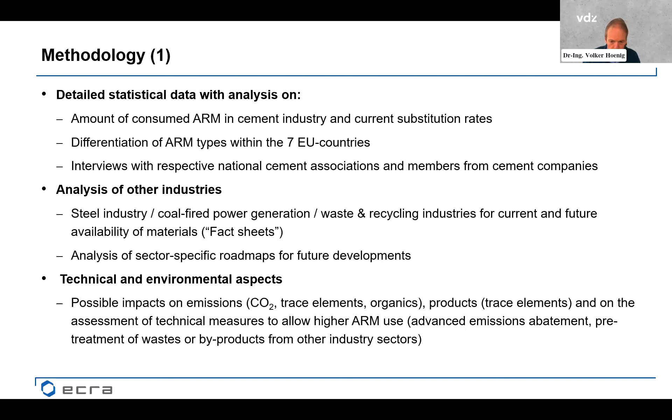Regarding technical and environmental aspects, we looked at impacts of the ARM use on emissions, CO2, trace elements, organics, on the products, mainly heavy metals, trace elements, and on the assessment of technical measures which would allow higher ARM use in the future, like, for example, advanced emissions abatement when we talk about organics, or also pre-treatment of certain materials or byproducts which could be made available in the future for the industry.

On European level, one important aspect was, of course, the contribution of ARM use to CO2 reduction or avoidance, and chances and limitations of the future potential of the materials which are used already today regarding development, and possible new materials which may be used in the future, but which are not yet used today.

Important was to define what we mean by alternative raw materials, because we have seen that the definition in the available statistics is not the same in all countries. So we have said that ARM are defined as materials which are wastes or byproducts from other mainly industrial processes or societal sectors, and which are not classified as alternative fuels. We know that we have materials which are somewhere in between fuels and raw materials, like, for example, sewage sludge. So this was our differentiation here.

We have looked at ARM which are used in clinker, cement, and concrete production. And we have excluded all materials which derive directly from the cement production itself. So we didn't include, for example, bypass dust, CKD, used refractories from the kiln, and so on, and materials which originate from natural sources. So we didn't include natural pozzolana or calcined clays.

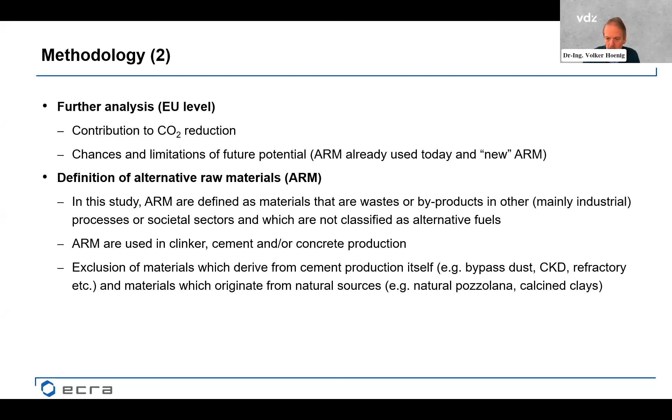As I will only have time to present one country today, together with CEMBUREAU we have selected Austria, because Austria is a very good example of a country with a very well-developed waste market for the industry. This is why I will focus a bit more on Austria today.

I will start with clinker production, so the use of ARM in clinker production. Do you see my mouse? Yes, we can. Okay, so the current situation is characterized by... we used 2019 as a reference year.

Those were the latest data available. About 800,000 tons of alternative raw materials have been used in clinker production in Austrian cement plants, which corresponds to 15% of the total raw materials used for clinker production there. This is the top level in Europe.

When we look at which kind of materials these were, we see in this table the top 10 materials. In Austria there is a certain focus on waste from construction, so waste ceramics, tiles, and other construction products, and on the same level, spent bricks. This is very typical and also very specific for Austria.

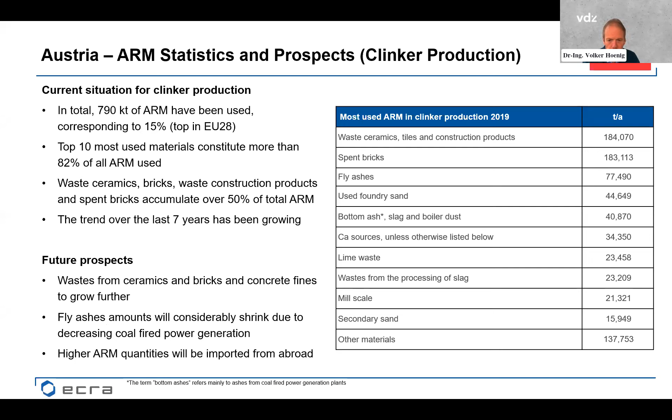Coming to the level of cement production, we see in this slide that cement production was about 4.3 or 4.4 million tons in 2013, and it increased to about 5.2 million tons in 2018-2019. We can see that the level of ARM used in cement production was about 1.1 million tons in 2018 and 2019.

When we have a deeper look at the different kinds of materials, we see that the main three-quarters was blast furnace slag. Austria also has a strong steel industry today, and the blast furnace slag is mainly used in cement production.

Furthermore, flue gas desulfurization gypsum has been used, and also some fly ashes as materials in cement production. When we look at future expectations, it is expected that fly ash and slag will decrease mid to long term, and since slag represents 75% of these materials, this would mean the total quantities of ARM would decrease significantly.

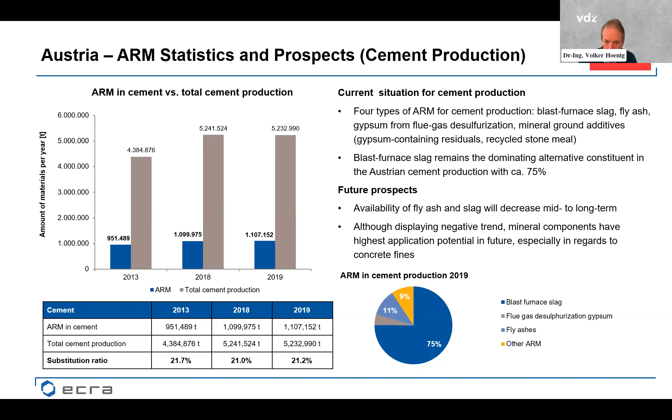Then the third level is concrete production. I must stress that the statistics for the use of materials in concrete production are not as good as the data for clinker and cement production, so what we gained were these results here.

We see first of all the ARM used in concrete production as a percentage. In blue we have Austria, and in gray EU28. First of all, the level as such is much, much lower, at about 2 to 3%, and we see that the trend has been negative over the last 7 years.

It was not possible to get full information on the materials used, but at least the most used one was fly ash, at least from 2018 to 2020, so fly ash from coal-fired power generation went mostly into concrete production.

The level of ARM content in concrete was about 50 kilograms per cubic meter, coming down from more than 60, around 67 to 50, corresponding to only more or less 2% today.

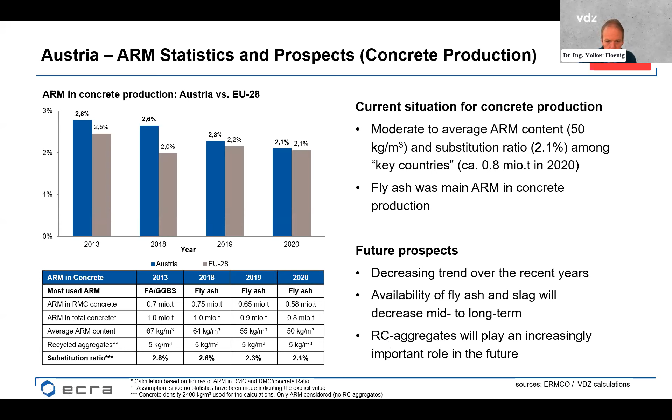Now the very interesting question: what is the level of CO2 avoidance with the use of alternative raw materials? We looked mainly at the level of clinker production. It is not so easy to do this estimate or calculation.

We had to look for some assumptions, and there's also quite a big uncertainty in these estimates. We did this based on the calcium oxide content, the decarbonated calcium oxide content in the materials. We assumed certain materials are decarbonated because they come already from a high temperature process. Then we did some estimates on the composition, and going to the mean estimate, we came up to about

35,000 tons of CO2 per year have been avoided by the use of these materials. This corresponds to about 10 kilogram CO2 per ton of clinker, keeping in mind that producing clinker makes up about 800 to 850 kilogram of CO2 per ton of clinker.

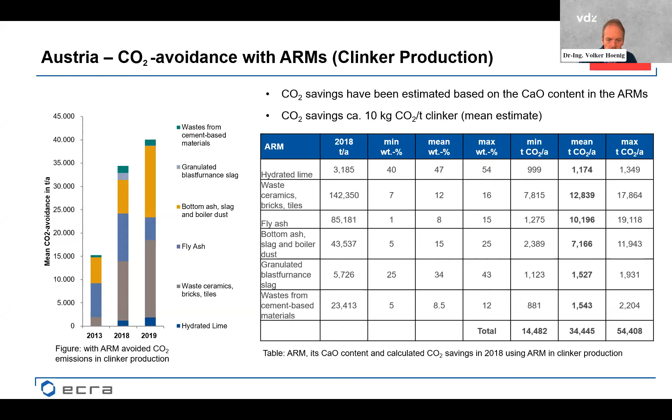Summary for Austria.

From the market point of view, Austria has a really well-developed alternative raw materials market, which allows this really high level of 15% substitution rate in raw materials. By this, Austria is number one in Europe. We see again this positive trend I mentioned before: in 2013 the level was 13%, and in the meantime it came up to 15%.

The waste market is characterized by a quite large variety of very different raw materials which are used, which of course allows the cement producers a quite high flexibility with respect to the specific situation in the cement plants, and also to the raw material composition they have on site.

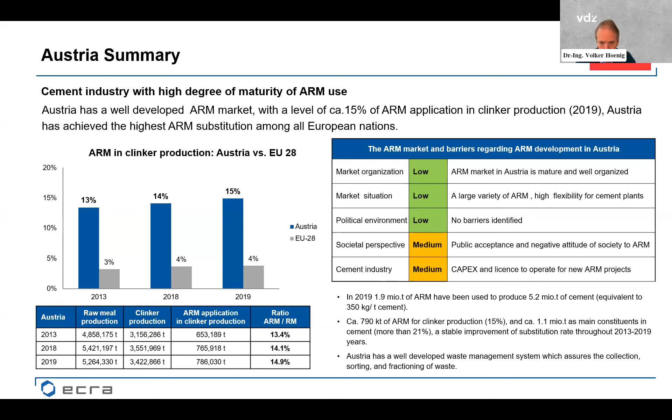Now I would like to compare this with EU 28.

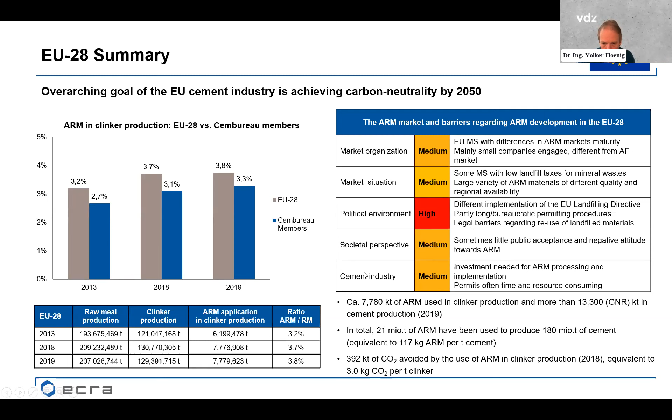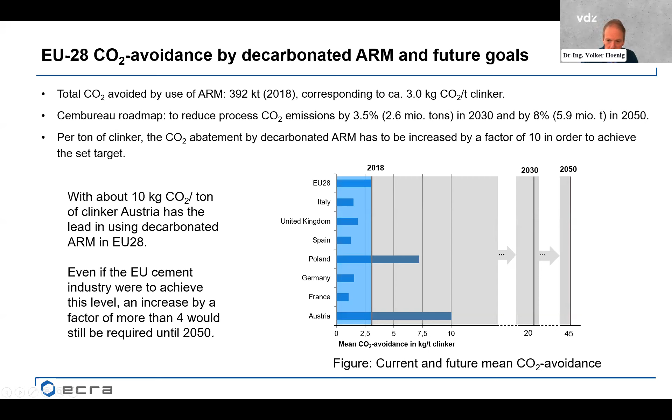Summarized, when we look at the availability of decarbonated materials, we have assessed this as really, really challenging to achieve.

To come to the summary: the use of alternative raw materials differs significantly between different countries. The availability of some traditional ARM will decrease significantly in the future, like fly ash and blast furnace slag. But in some member states, historic landfills could be recovered and made available for cement and concrete production.

Furthermore, some new ARM have to be made available for the cement and concrete industry, like ashes from sewage sludge incineration, bottom ashes from incineration, slags from steel production with direct reduction in the future, and maybe others. Construction and demolition wastes also offer big quantities, but their use in clinker production is limited by their composition.

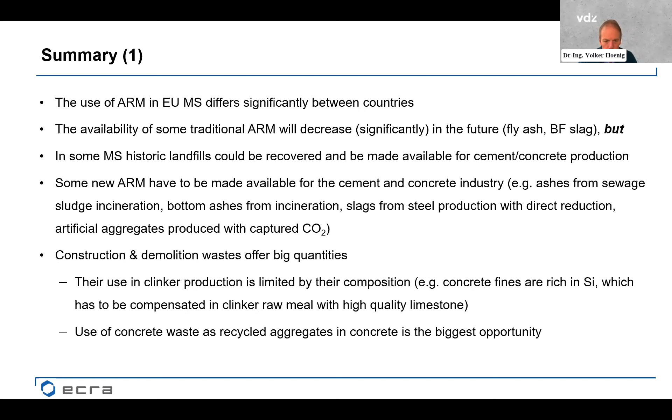For example, concrete fines are rich in silica, which has to be compensated in clinker raw meal with high quality limestone. And the use of concrete waste as recycled aggregates in concrete is the biggest opportunity.

Regarding limitation, as I said, the low calcium content in most ARM limits their use in clinker to a few percent. Some materials will have to be treated to make them suitable for cement and concrete, for example, elimination of high heavy metal contents, like in incinerator slags.

The content of organic matter limits the use of ARM in the raw mill. Such materials can only be used in the hot kiln section or in plants equipped with RTO technology.

And last but not least, the impact on CO2 emissions is limited. Today we have about 0.4 million tons of CO2 per year which are abated by these, but the availability of these materials is rather limited. So as I mentioned, to achieve this 8% target from the CEMBUREAU roadmap with this means is really challenging.

Thank you very much, and I'm open for questions.

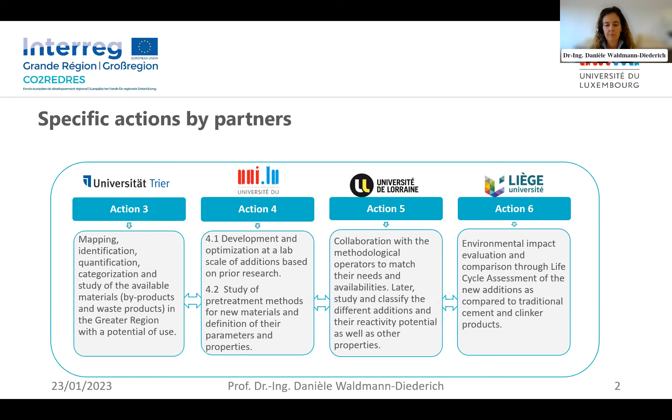Especially Vicat in France was developing within this project a semi-industrial production line in order to generate calcined clay. We also had producers like Contern of concrete elements, who were quite interested in our study, as well as Weber from Saint-Gobain. Now I would reach over to Sinan, who will give you an insight into the studies we did at the University of Luxembourg on the different materials identified. Sinan, thank you very much. Yes, I'll take over from here.

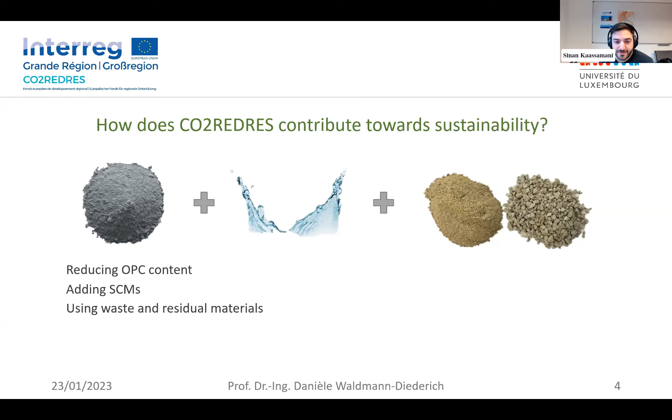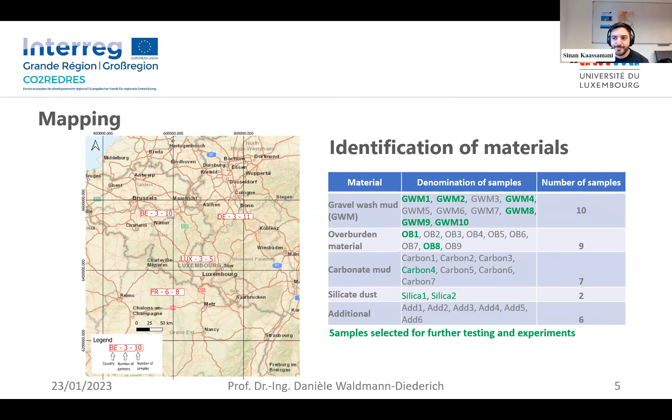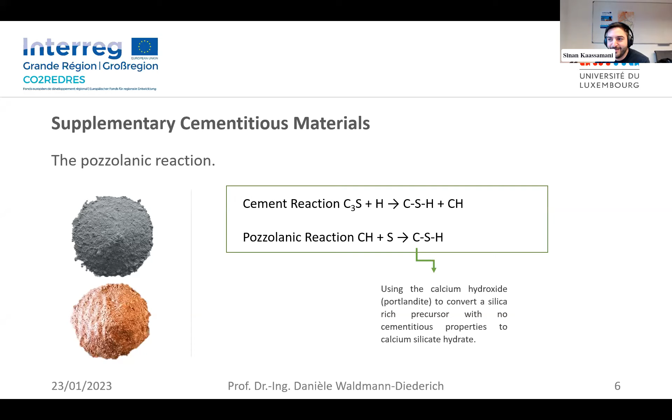There were other concepts that were also tried, such as chemical activation, geopolymers, and LC3, with other partners and universities. But for now, we will just talk about partial substitution of OPC.

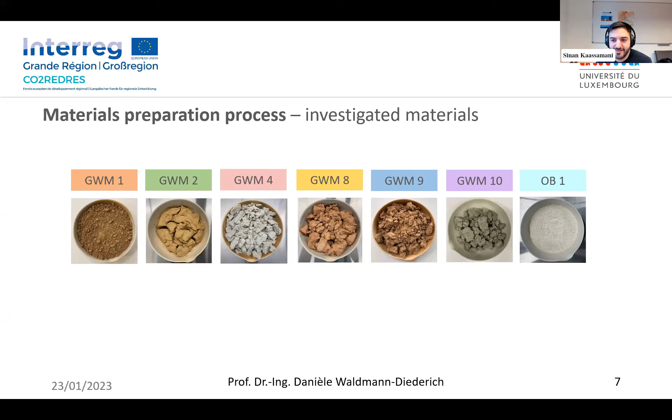So with these materials, here we can see the materials that we worked on - gravel wash muds and one overburden layer. This is how they look like. They come from different places in the greater region, and they have different colors and different textures.

For our experimental outline, in the first step, we prepared these materials. In order to have better chances at activation of such clays and gravel wash muds, we followed the process of drying and crushing, then calcination, and then crushing again. It is of interest to have the finest possible material as a substitution.

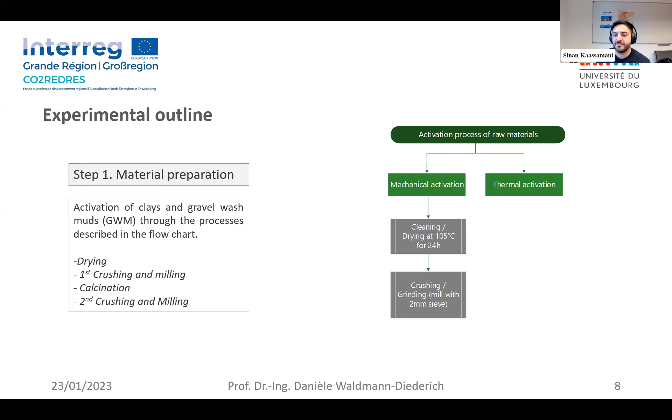For the activation, as I mentioned, we had mechanical activation and thermal activation. By mechanical activation, we wanted to achieve better fineness. So we had drying at 105 degrees for all the materials for 24 hours, and then crushing at a 2 millimeter sieve. After this crushing, we had the calcination at 3 different temperatures, and then a recrushing and regrinding process.

So this was the first flow chart. By thermal activation, we want to achieve dehydroxylation and then formation of more amorphous phases that are more reactive as well.

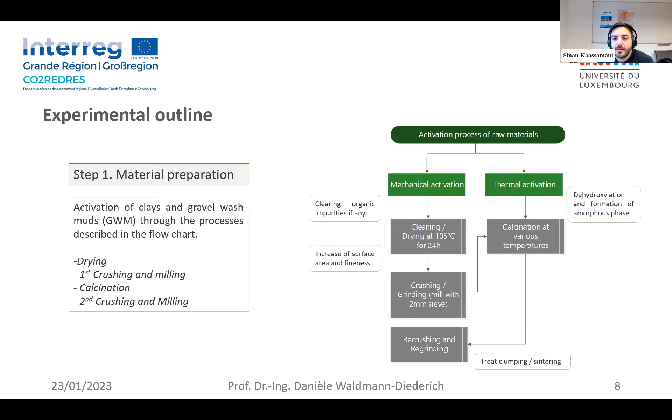So these are the materials that we used again, but we can see them in their 3 states - the dried material, under it the grinded material, and then the calcined material. You can see the change in texture and color for almost all of them.

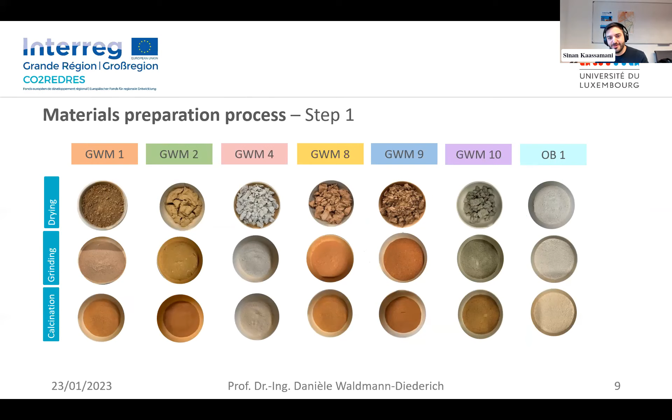And then from now on, the results that we see are color coded, so everything that's orange would be related to GWM1 and so on.

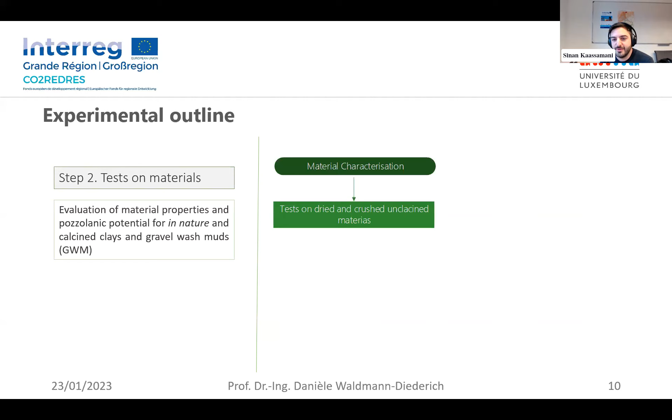So for the second step of our project, we evaluated the properties of these materials - the in natura, pure material, and also the calcined material. On the material characterization front, we ran tests on dried and crushed uncalcined materials, such as chemical composition, mineralogy, fineness, particle size distribution, TGA, and pozzolanicity as well.

I will not show all these results because it will take too much time, but it's interesting to comment what we actually looked for. For instance, in chemical composition, we want materials that are rich in silica and alumina. For the mineralogical composition, we wanted to see which clay minerals are there - is it majorly kaolinite, illite, if there's too much quartz. As well with the TGA, the thermogravimetric analysis, we measure where the exothermal peaks are, and where the dehydroxylation is actually happening.

And then, we treated these materials - first we studied them, and then we treated them thermally. We calcined them at 3 different temperatures, crushed and grinded again.

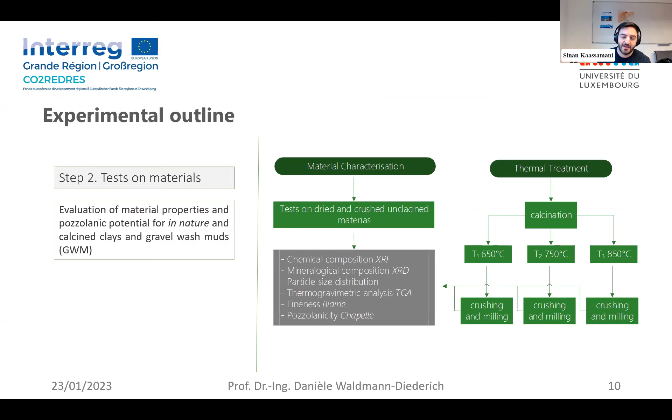And then we studied again the same set of tests for all of them to see the differences, and I will show some in my presentation today. So after studying this, we also made tests on binders and mortars.

So to evaluate strength, compression, as well as tension, but mainly compression here. We evaluated binders and mortars for 7, 28, 56, and 90 days with a 20% substitution rate. I will present only the results for 90 days, which I will show later.

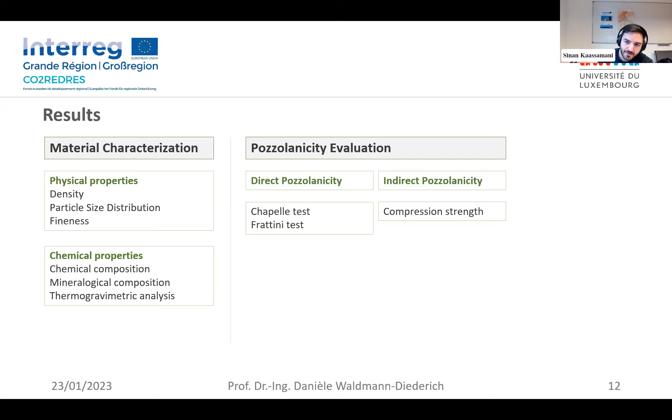For the results, I will skip the material characterization and get into pozzolanicity. We studied direct pozzolanicity through the Chappelle test and Frattini test. If anyone is not familiar, these are tests that we run - it's sort of chemical, checking the material itself and not its strength. And indirect pozzolanicity, where we check the compression strength of our specimens after mixing with cement as a substitution.

It's interesting to see that many of our materials, which we didn't pick and choose - these are materials we had from our partners - no extra sieving to take out the quartz was done. It's basically trying to see the full potential of these materials as they are.

So we can compare the reactivity of uncalcined clays to the calcined ones at three different temperatures. This is an important result because it shows that the materials are improving their pozzolanicity after calcination at temperatures relatively low compared to kiln temperatures. This is expected to give us reactivity.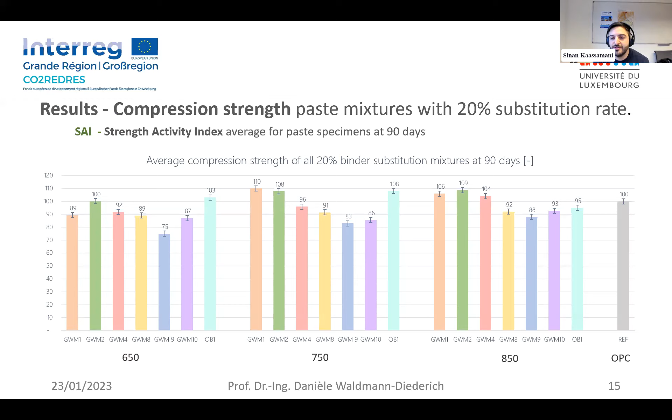They are almost all over the mean of 75%, and in some cases there were improvements, such as 110 and 108% for GWM1 and 2 at 750 degrees, also OB1. This is for binders.

Also for mortars, we had similar values of around 70 to 100%. As we can see, almost all the materials that we studied are promising.

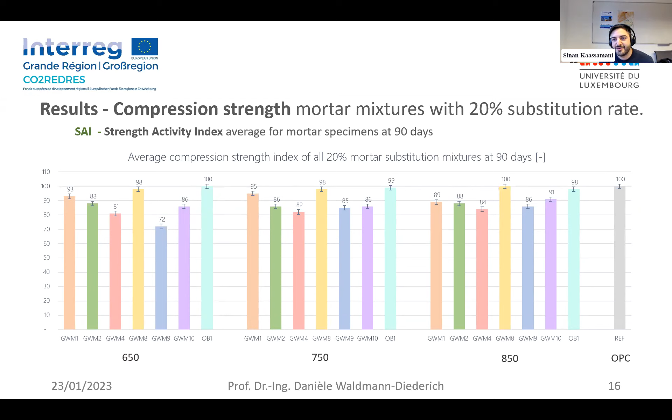In total, we were able to identify 34 different secondary waste materials, where 11 of these were promising materials with high potential to be used in industrial cement production. Out of these, 4 resources showed that they were very interesting in terms of heat treatment combined with appropriate grinding, so that we could produce reactive cement additives.

Our calcination temperatures were between 650 and 850 degrees. Although we got not a high reduction in compressive strengths, we could come up to high substitution rates of about 55%, if we accept a reduction in mechanical performance of 6% or 15% for these two materials, OB8 and gravel wash mud 4.

So we could come up with interesting substitution rates. We also tried to have a combination of different substitutions, made out of calcined clay and in addition combined with limestone. So we came up to substitution rates up to 50% without any loss in compression strength.

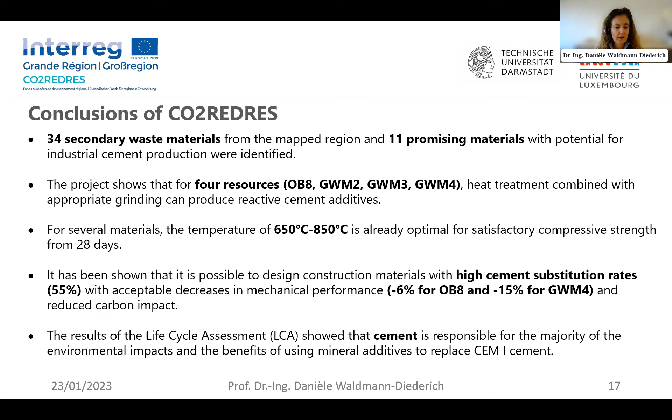Then I was asked by CEMBUREAU to present our new initiative. We are now preparing a new project proposal that we plan to submit soon, which will also be an Interreg proposal, this time for Northwest Europe. We use the same approach but on a larger area, using waste clay materials prepared as substitutes for cement to produce concrete.

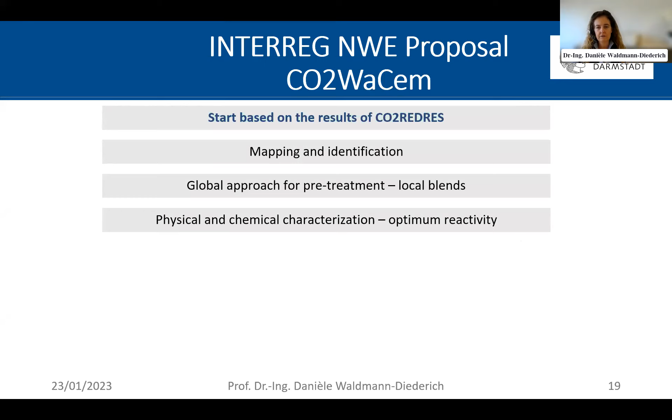In this new project, which builds on the results of CO2REDRES, we try to map this larger Northwest Europe area and find more materials. The difference from the CO2REDRES project is that, since these materials are limited in quantity, we will try to combine them locally into blends to ensure stability in properties over time, and to have larger volumes available for an economically interesting solution.

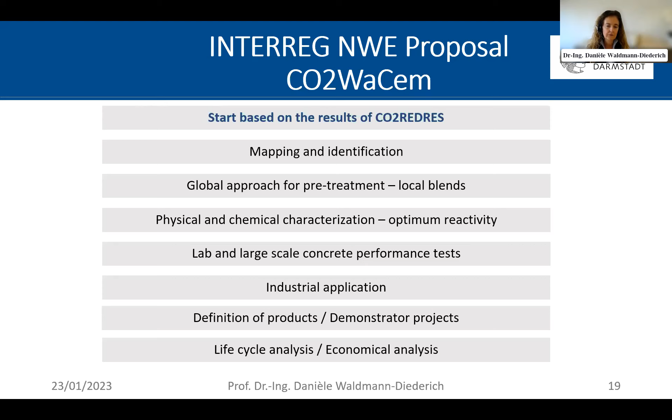In addition, we will do physical and chemical characterization of these materials, with lab tests as well as large scale tests. We want to achieve full industrial production of waste clay materials which would then be added to cements. This would be our first product, and we would also generate other products.

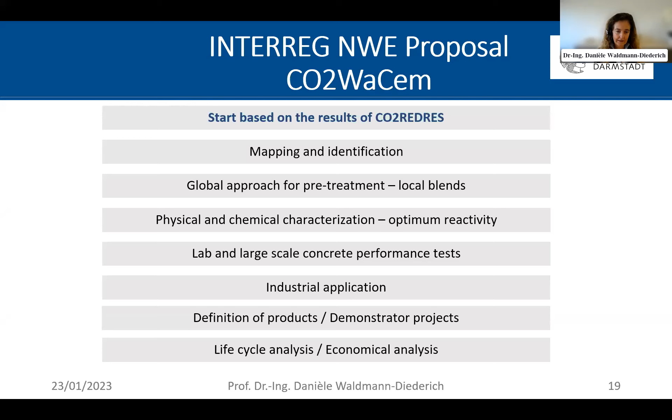We will try to define other products and make demonstrator projects in real constructions, with some structural elements realized with concrete containing our calcined waste clay material. We will also do an economical analysis as well as a life cycle analysis. In the summary, the next slide shows what materials we will be looking for.

We will use gravel wash mud and overburden material as in the CO2REDRES project, but we will also try silt material from dredging. Then we will do a classification, calcination test, and testing at laboratory level, and try to build up different blends out of the interesting materials.

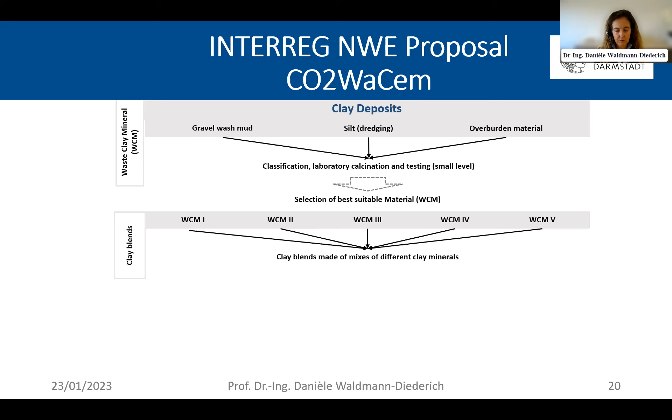We continue in order to create a new binder, which would then be cement clinker plus gypsum and calcined clay. This new binder will then be used in concrete production in order to produce a more eco-friendly concrete.

Steffen Schmidt Group will do the mixes. We have the cement producers Vicat and Dyckerhoff on board, and Weber Saint-Gobain, which will try to use our new concrete in 3D printing in the Netherlands. We have a producer like Fives Group in France, producing flash calciners to have an impact on this equipment. We also have associate partners like CEMBUREAU, Solid Unit and Bauwirtschaft in Germany, producers of aggregates like Arweiler Resch, and Cimalux in Luxembourg as a cement producer.

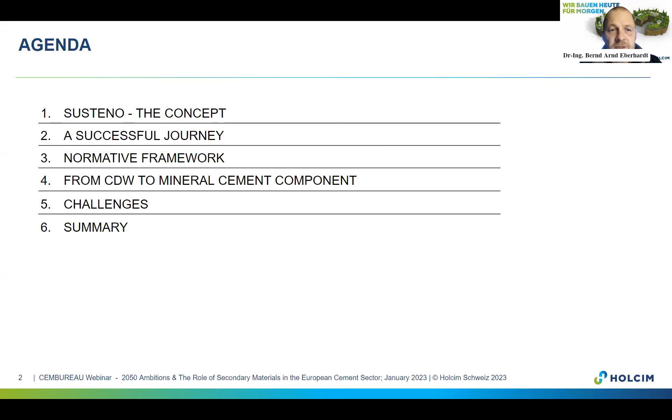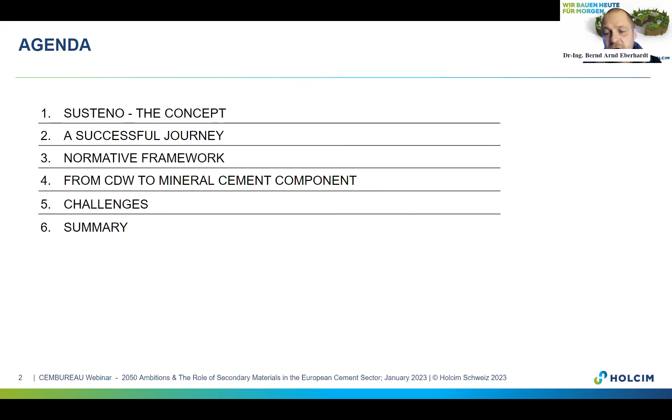So then I will take you through the rather successful journey of this, and then refer to the normative framework, which is very important in order to be able to launch such a product, and then give you some insights or perspective on using waste as a mineral component in cement. Before summarizing, there were some challenges that we experienced in developing and launching this product.

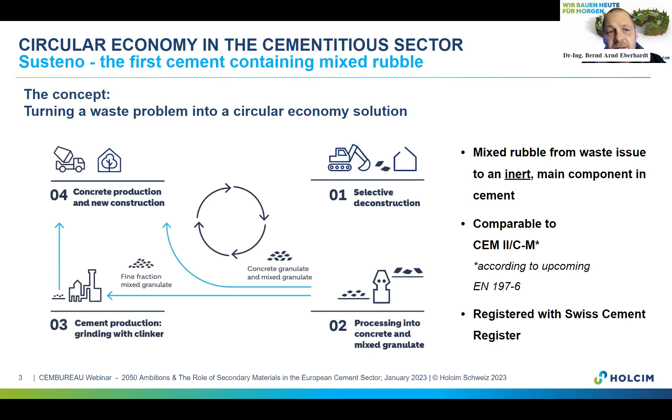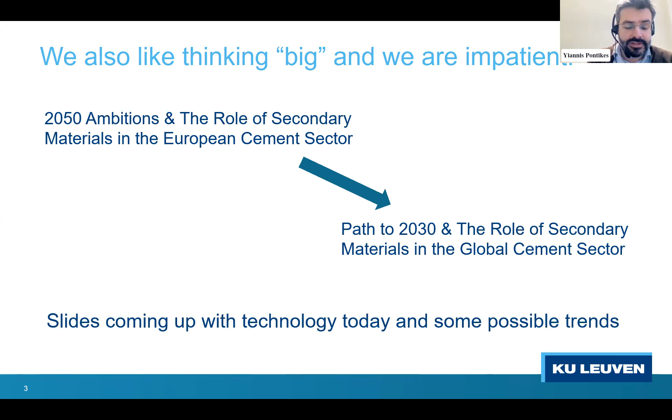So consciously, I put some slides forward with technology that I think is of high TRL, that can make an impact relatively soon. And I'm trying at the end to do kind of a psychoanalysis of why things are not happening, although they seem so good in papers and in presentations.

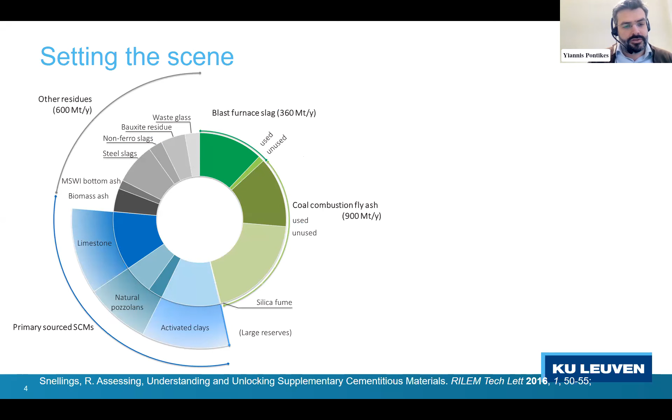Famous slide by a colleague and friend, Ruben. You see on the left hand different SCMs: blast furnace slag, coal combustion and the likes. Some on the more left hand are primary sourced and other residues. Message from that slide, and I think from the quote I took from a paper of Professor Scrivener, is that although the most viable option involves blending cement and creating these blended cements with SCMs, the availability of these common SCMs is low compared to the demand for cement, which is 4.2 billion tons globally. Other materials might not be readily available.

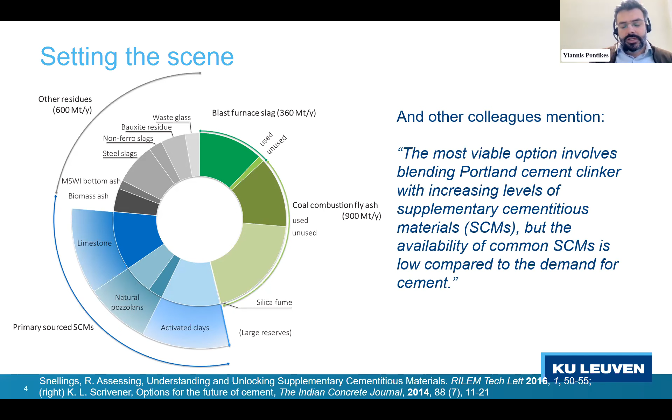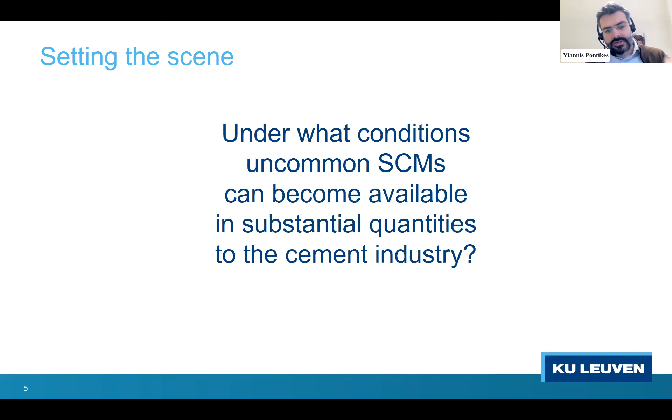So I took that and I'm reverse engineering it, changing it, and putting the question forward: under what conditions can uncommon SCMs become available in substantial quantities to the cement industry. So then I'm trying to answer each one of these lines - uncommon SCMs, availability, quantities - and of course how that can help the cement industry in practice, which means really minimizing CO2 emissions, ultimately the whole environmental impact.

That can be bigger. What you see, in fact, is the non-ferrous metallurgy, and eventually we rediscover the obvious: that these glasses are also called slags. When you speak about copper production or lead production, these are the typical chemistries that the industries are working with. But in fact, that can be a bigger story - a number of metallurgical industries could convert their residues into these selected chemistries.

Now, pay attention to the high temperature process that you are going to be employing. You can also do fuming. Fuming implies that certain metals or elements can simply become volatile, so they will leave your process. So you have, let's call it, a heavy metal depleted glass - not science fiction. I can give you examples on that.

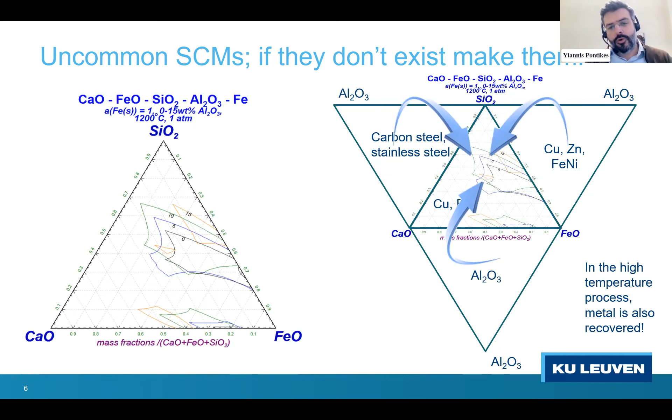And of course, you can also selectively choose the way you do your cooling. So you have certain phases precipitating, incorporating heavy metals inside. Spinels are the usual suspects.

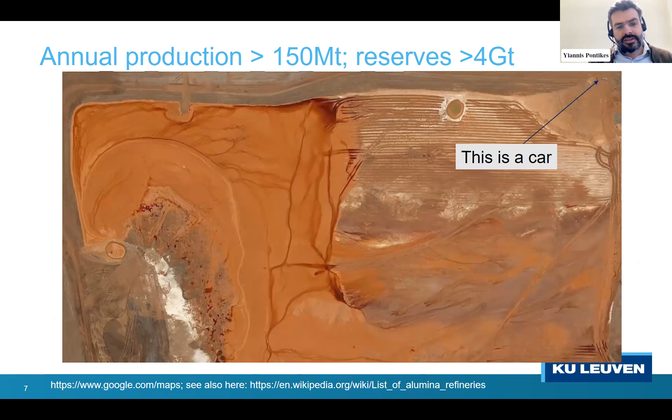In case you start asking yourself, where can I find that - bottom line, you can see a list of alumina refineries. That little thing in the right corner up is a car, to get a feeling of the scale. And of course, this is something that has been in my life for some years, decades to be precise. It's called bauxite residue, also known as red mud. Lots of iron in that context, in that chemistry, that we try to valorize into products simply because it fits the thermodynamic calculation we've done in the slide before.

How would you do that on a bigger scale? We have our own containers, but it's not that difficult after all. You just add your precursor, your residue in this case with the silica, the alumina, and the calcium. You can add 2% or 4% carbon.

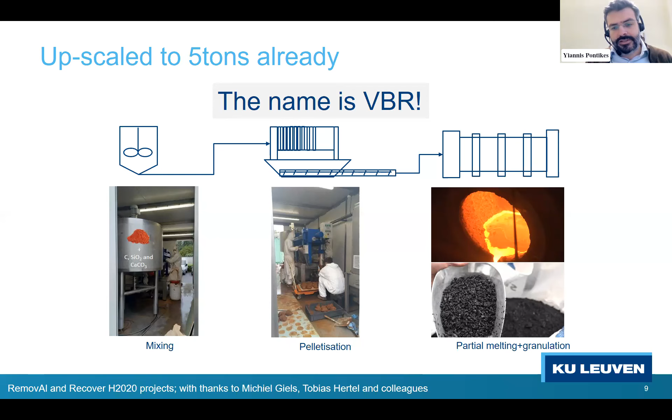Then you have to do the milling, and you can use existing infrastructure, being a ball mill or a vertical roller mill, to do it. So we know also about wear rates, throughput, and energy consumption. Please don't be intimidated, it will be fine.

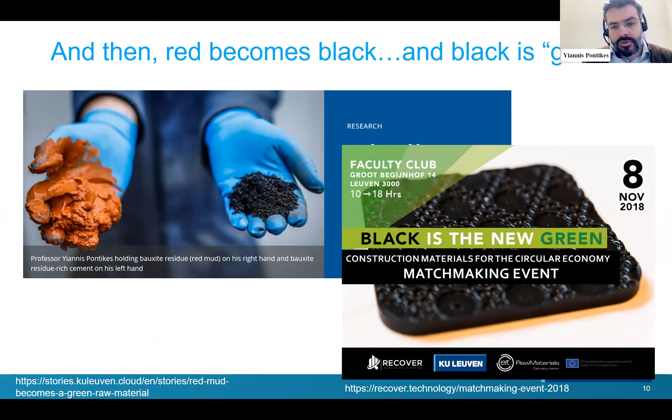What do you do afterwards? Some publicity first to conceptualize the thing. Your mud becomes a black slag. And then you bring together, I think that's the interesting thing, all the non-ferrous metallurgy, both the alumina refineries and the copper and the slags and the lead, together to create this black precursor. And you can play with the words: the red becomes black, and the black becomes green.

Speaking of performance now, what you can do, 3 options. You can do inorganic polymers. Inorganic polymers is what some people call geopolymer, but the inventor of that word will now have a hard time, because he carefully says this is an aluminosilicate, this is not an aluminosilicate. It has plenty of iron inside, so it's an inorganic polymer. It's a bigger family of materials, where the geopolymer is actually a subsection of that.

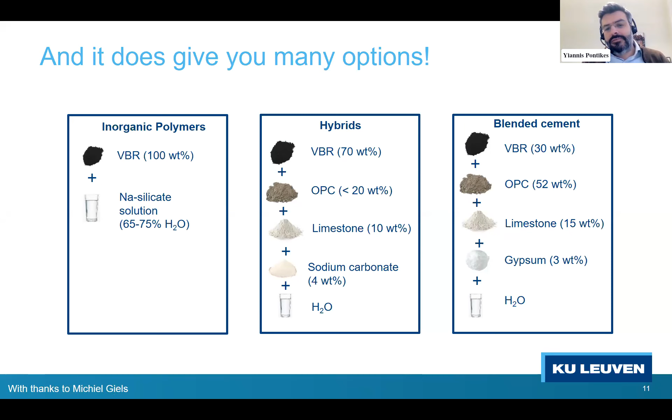If you add a sodium silicate solution, that's the first option. Or you make hybrid cements, with a tiny bit of alkalinity, and here you have, in fact, also Portland cement and limestone. Inspiration to some extent has been from LC3 cements. Or you can also go to more classical blended cement formulations, as you see on the right hand. So, 3 options, and in each case you have different performance, different impact, different advantages and disadvantages, and also different hydration products.

So in the first case, you can see here the performance, which I think most people will be asking about. At 28 days, more than 100 megapascal; at 2 days, plus 50; at 7 days, about 90. Hybrid cements, depending on your mix design, but anyway at 28 days still very, very decent, I'd say 40 megapascal.

In terms of environmental footprint, this is the best, and in terms of cost also. Blended cements are also very good, more than 50 megapascal at 28 days. Usually people are reluctant about the early strength, but I think it's decent, and it can of course be enhanced, because in the blended cements and hybrid cements, plasticizers do work. So if you have access to PCEs, please give them a try, and you will see that things will improve with respect to performance and perhaps with respect to durability.

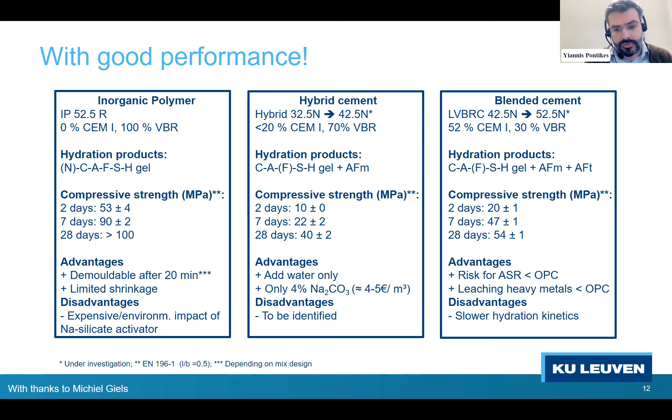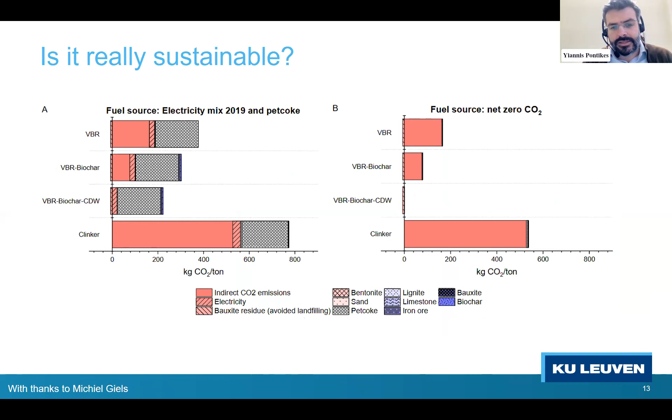Question: is it really sustainable? My answer is yes, and the extent depends. You see here the clinker, and here the VBR, the vitrified bauxite residue. Depending on how you do the reduction, and depending on your energy mix, your electricity mix, you get different numbers. What's important is this one, that theoretically can be 0, because we're not using limestone in the formulation, and we're using electric furnaces to do the job. So if that power really comes from a green source, then indeed that's a precursor that does not have any CO2 emitted.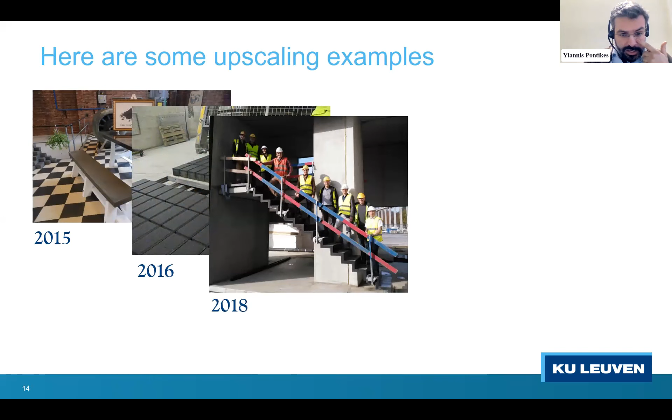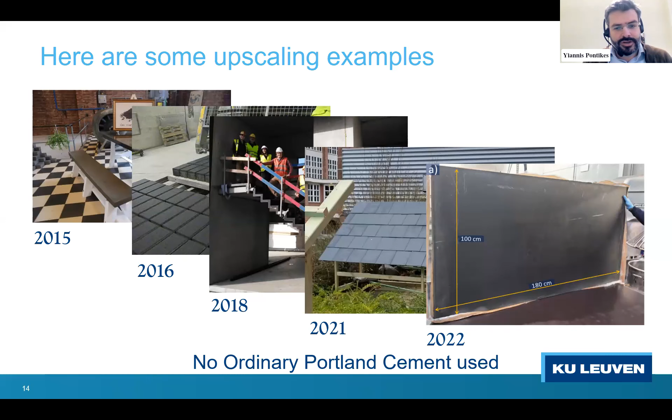Then we made tiles, the stairway to heaven, more than 140 megapascal in compressive strength, also with fibers inside, tiles or slate tiles. And the last thing we did this year, or the previous year actually, was a porous panel that can withstand fire. That was done in 2022. It's 180 by 1 meter, and it's been tested also by independent labs in Spain. Believe me, it is good in a thermal shock. So you can put that in a tunnel, and that's also an application.

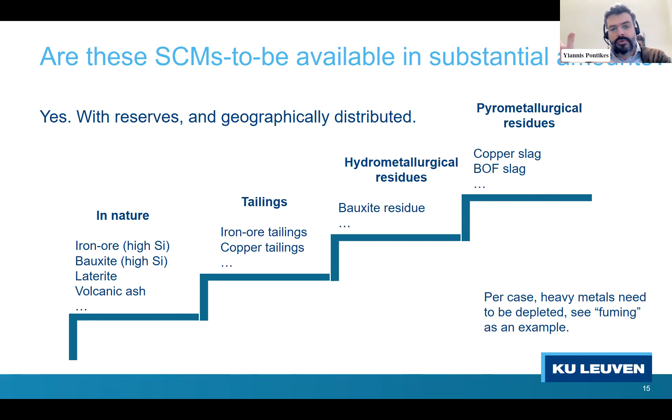We use plenty of iron ore, more than 2 billion tons a year, and there are still reserves around. In fact, we're not going into competition with the iron industry or the alumina industry that needs bauxite. We are looking into reserves that have high silica, which is not a desirable component in these ores, to be precise. So I think we can still be complementary to others and eventually meet the demand of this, maybe one day, cement industry. So far so good.

Why is this not happening? I'm trying to put myself in the difficult position, and here's what I think could be the case. One is the cost. When it comes to residues, there will be support from the owner, but when it's a primary raw material, there will be higher cost. Sometimes there's a conflict of interest between an industry that is having a residue and an industry that also has an iron ore. So it's a difficult exercise, and I think in the future there will be competition on who has access to what.

What I see as a trend is that the cement industries evolve into materials industries, covering a wider spectrum. And when I look at projects we have here, I see more and more the possibility for joint ventures, and some kind of strategic alliance between the cement industries and the metallurgical industries. So I see that as a trend, and I wanted to put it forward.

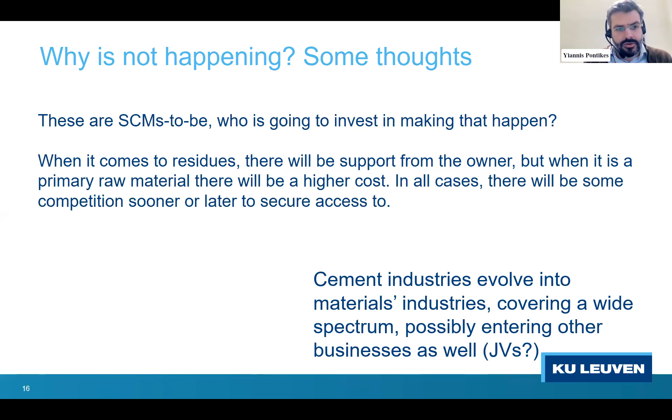What about the available quantity? Europe alone, 171 million tons per year. How much can we really substitute? My answer is that it depends—depends where you are, depends what the society is looking forward to see happening. Different priorities, I guess, in Greece, different in Belgium, different in Germany or Austria, as we had before. So yes, it matters where you are, but in some regions the impact can really be high. I'm very honest about that.

So how do I see we should be moving forward? Perhaps we should find these front runners in order to inspire the others. And perhaps we should also accept that one solution for all is not going to work. The reason is that distance is important. When you do an LCA analysis, you see it has a huge impact on the environmental performance and, of course, on the cost. So I think we should be looking in our vicinity, at what we can use nearby.

Third thing, related also to the use of waste, which I hope you find interesting and to some extent entertaining. Two aspects here. One is the pressure cooker—why are we so okay creating performance-based standards for our food? We take it seriously that this is not going to explode; it has to sustain a certain steam pressure. But when it comes to cements, we still have prescriptive standards.

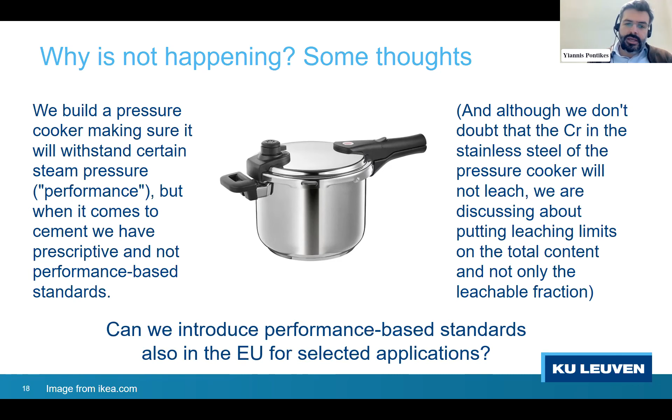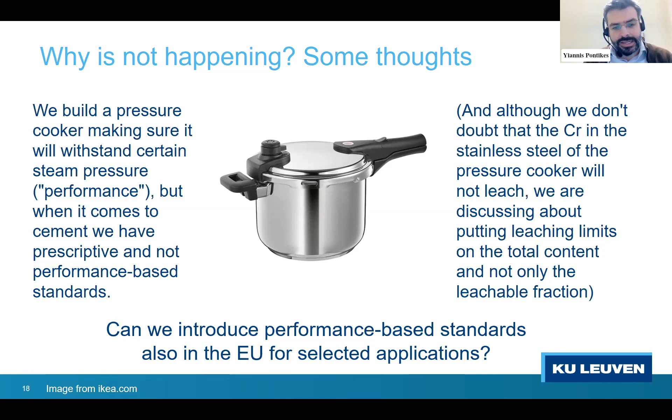A philosophical question, the second one, to the right: if you know about stainless steel, there's plenty of chromium inside, yet you're not really doubting that this will end up in your food, in your soup. On the other hand, when we speak about alternative raw materials, we refer also to the total content, not only the leachable content—see the presentation before. So a question to myself: why are we doing that to ourselves eventually? Why don't we just create performance-based standards, which already exist in other countries outside Europe? I know durability and risk and fears, fine—but what if we start from applications where we can actually live with and manage this fear?

Another point that I think is very important: we care for the environment, I believe that, but at the same time things happen too fast and happen concurrently. I think it's difficult to digest what's going on and how we can keep up with all this evolution. To some extent, and I guess that's part of human nature, we still think only of our own business—we cannot always have this overview. I'll give you some examples from metallurgy, so you can see that they actually have exactly the same problems and challenges.

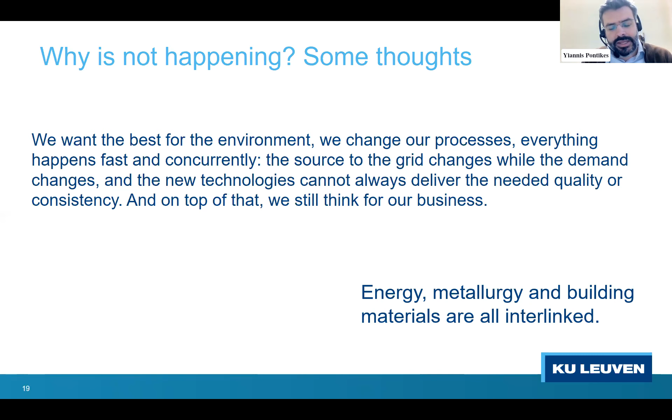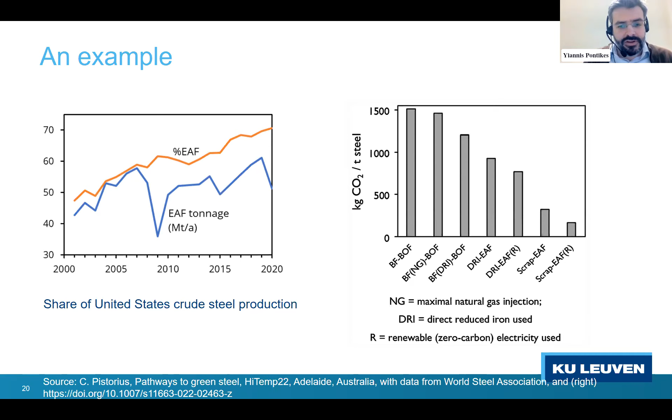Every single process you choose will have a different impact on the slag quantity, chemistry, and mineralogy. So how do we really make sure this is the best overall solution for the environment? Because it might be absolutely perfect for the metallurgy, but collectively as society this might not be the preferable option. That's difficult, because we need to think wider in a symbiotic manner, and that goes beyond the boundaries of my own business.

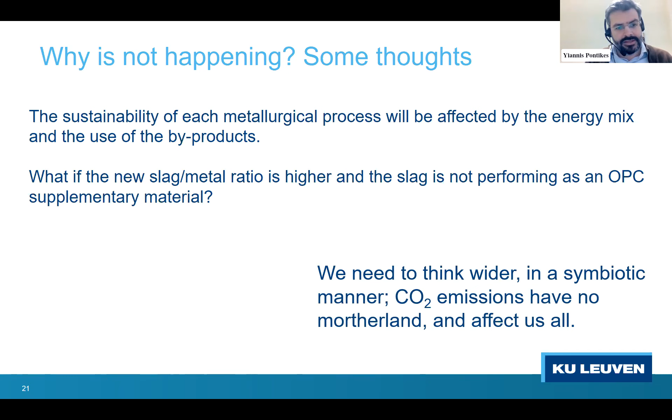Sadly, CO2 emissions have no motherland, so they affect us all. It doesn't matter if they come from the steel industry or the cement industry. And the last thing — I guess I'm a bit teasing academia or people who think they know about everything —

Sometimes we think certain things are true and will remain true because that's what our experience has been telling us. For instance, we've seen in our work that people think if you have sodium, you're definitely going to have alkali silica reaction, or that iron silicates cannot work. We did it — we took only iron, oxygen, and silicon, and we made samples out of them. Of course, that makes it difficult to speak with people from different sectors; they will not understand our language.

But I would say these statements are only occasionally true. In many, many cases the boundaries are now much more diffused. We all have the same problems, so we'll try to understand each other, and I think we should be more open to that. Hopefully with AI and machine learning this acceleration is happening, and I believe future cements will actually be a bit more clever than the cements of today — more multi-component, including organic additives, not just binary.

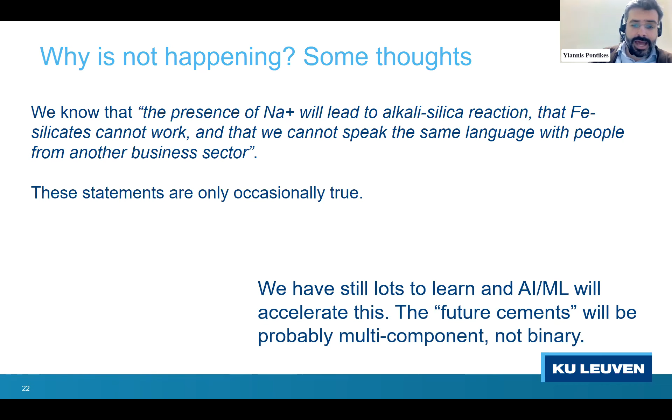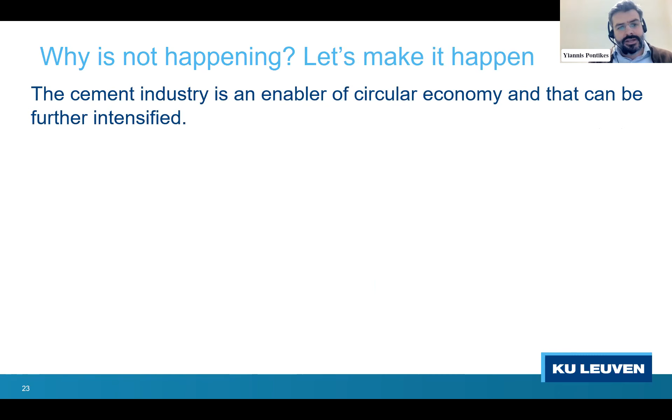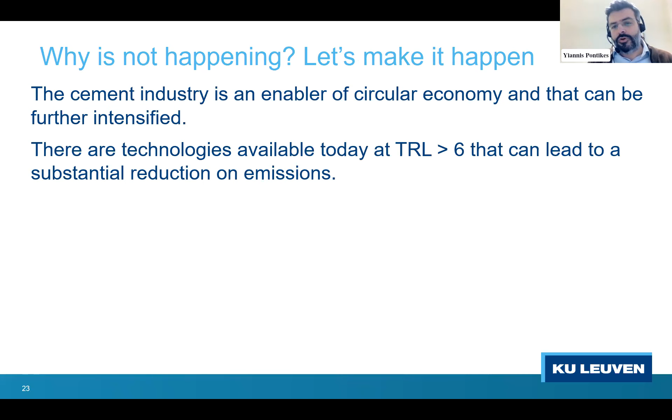So why is that not happening? Let's flip it around — let's make it happen. I truly believe the cement industry is an enabler of circular economy, and that can be further intensified. There are technologies available — the so-called low-hanging fruit at TRL more than 6 — that can have an impact on emissions today. I also believe and support closer collaboration between the cement and metallurgical sector, and in fact the energy sector too, because the problem is way above our league.

We should be looking into collective solutions. I also feel that the boundaries are way more diffuse nowadays than they used to be in the past, and there is more understanding — that's the nice thing between different sectors. And yes, it's more than emissions. Thinking of what happens in Ukraine and other regions, I believe all this collaboration will lead to more co-growth, more industrial symbiosis, or the so-called Fit for 55 initiatives by the EU, and ultimately to a more resilient environment for continuous growth over the years.

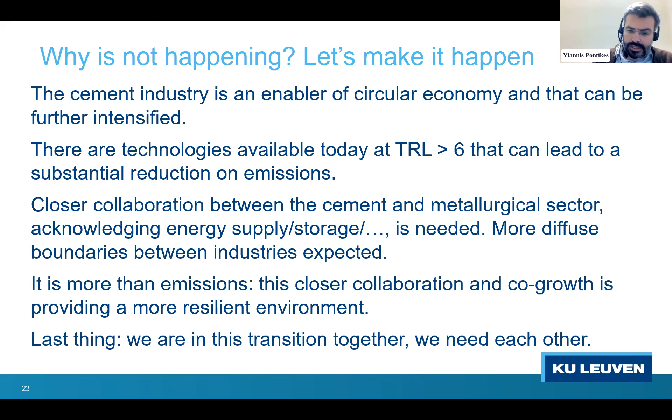The last thing, and I would like to stick to that: we are in this transition together, so I think there is no space or room for blaming. We need each other, and we should be helping each other. I hope I finish on time. I would like to acknowledge a number of projects over the past years, and I'm really open for questions. It has been a very nice chat in the background.

So thank you very much, Yanni. It was a very inspiring presentation, I have to say. Very nice quotes I noted, like democratic cement, black is the new green, playing with the color of waste and the environment — I'm a marketing guy also, funny enough. Excellent, and the closer collaboration as well with the different industries, metallurgical, energy, cement, for the common issue of CO2. Very good messages.

I would like to address one question in the Q&A. Based on your expertise, what do you think about the current ambition of the cement industry to reduce the clinker to cement ratio to 65% in 2050? Should it not be much more ambitious? From our CEMBUREAU side, we have an answer to this question available on our website, but we're very much interested to hear your perspective as well.

Yeah, it's an interesting question, and I have a difficulty in answering it, not because CEMBUREAU is listening, but because what we often do, and I see that also with EU policy, we define the targets, we define the ambitions, but we do not define how we will reach those ambitions.